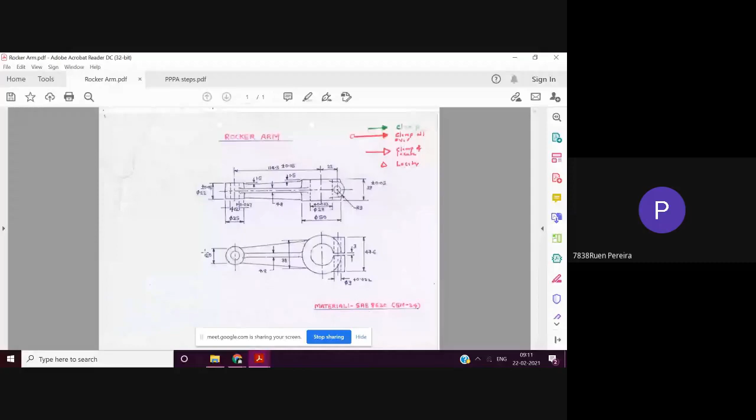Hello, hello. Yes, sir. Yeah.

This is the drawing of a rocker arm, and we are going to do preliminary part print analysis for this. Some steps have already been covered. I hope you went through this during the weekend. It is not that complicated, but also not that easy.

Now, machining wise, you have to maintain this thickness, 22 plus minus 0.05 -- this should not be shown with that symbol, that is wrong. This diameter 22 symbol is also wrong. So the thickness is 22 plus minus 0.05, then this thickness of 28 plus minus 0.05 must be maintained.

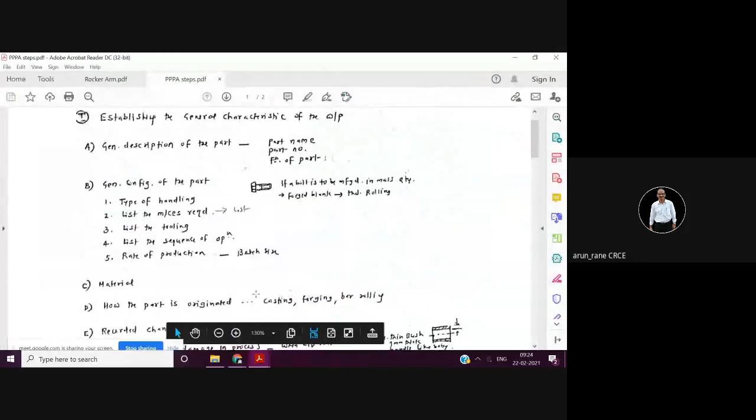So establishing the general characteristics, we have done this already. Auxiliary methods of visualizing the parts - here, since the part is a little complicated, we can write that a 3D model will be required, or some sample will be required for better understanding.

Principal process is cutting, and in cutting the major process is milling, because in milling you are going to finish, you are going to do most of the operations. Most of the operations are being done on milling machines. So principal process is cutting, and the major operation within it is milling.

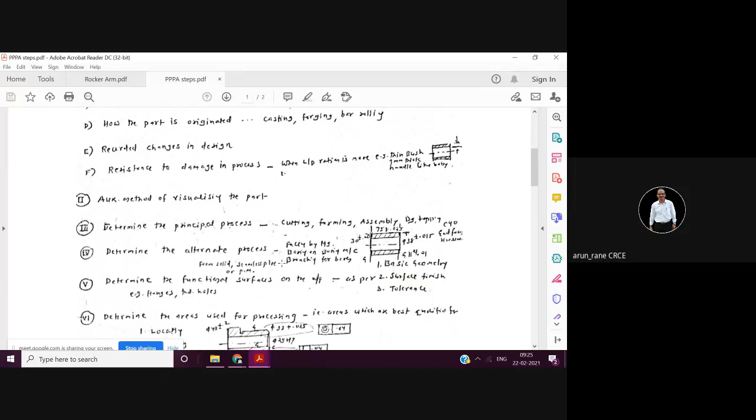Now functionally determine the functionally important surfaces on the workpiece. Functionally important surfaces are based on three categories: geometry, surface finish, and tolerances. Let us see now whether it is given in the drawing, and how we will identify it.

Based on geometry, you can write nil, because nothing is mentioned - whether this bore should be concentric to this, or perpendicular to that. Such specifications are not given, so against geometry you write nil. And against surface finish, there are no surface finish symbols, grinding symbols etc., so there also you write nil.

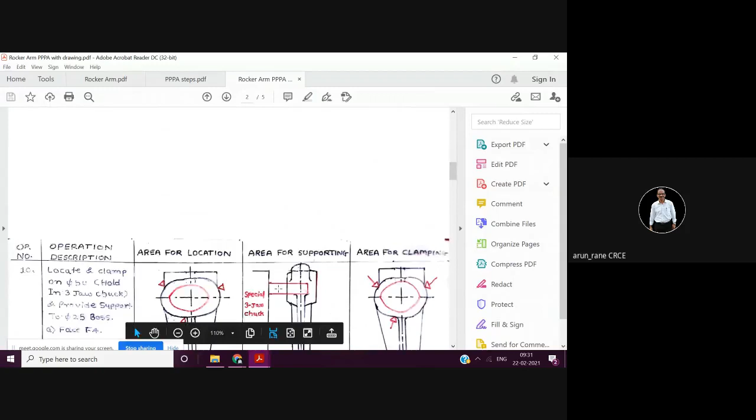So just give me a moment. This is the PPT. Here it is: preliminary part print analysis rocker. I think I have already uploaded this. In these notes, everything has been given clearly, and this is not ideal. There could be some mistakes, right? So you can have your own sequence. You can have your own locations. But now I will tell you what is happening here.

See, this is your faceplate, right? Here he is locating in a 3 jaw chuck, and he is doing this bore and also this facing. So the area suitable for location is this. Then the area suitable for supporting: this face and this face are not in one line, and this is a faceplate. On this faceplate you have mounted a chuck which is locating this and supporting this, right? And now areas for clamping. Your location as well as clamping is the same, so this outside surface can be used for clamping also. You have to see that when you are clamping with a jaw, there is no obstacle due to this rib.

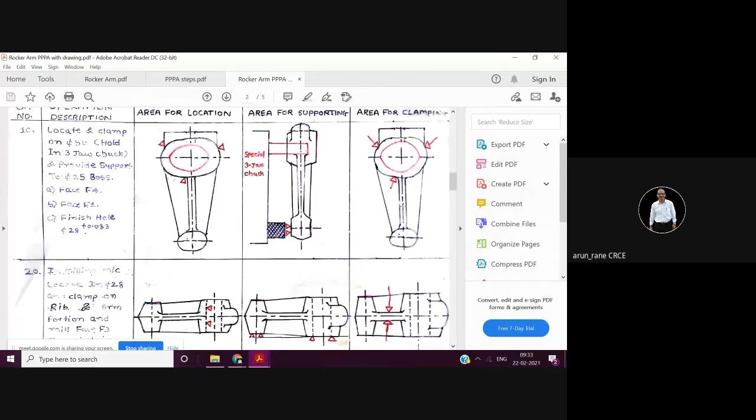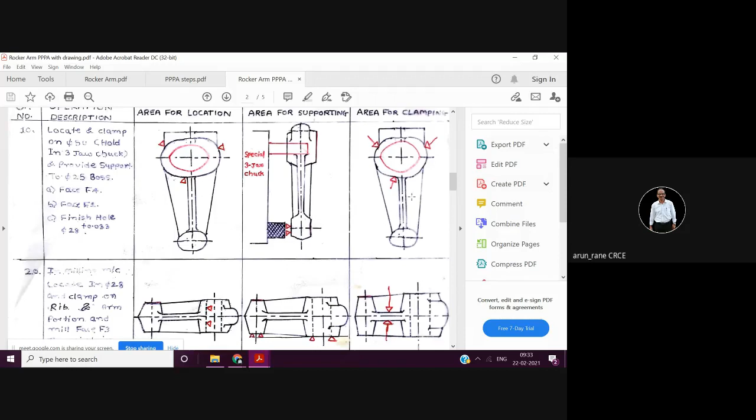And since there are 3 jaws, ideally you should have used a 4 jaw, because this is rough. So that's a mistake here. And another thing is, since this will be 120 degrees, this rib may obstruct. So ideally you have to use a 4 jaw hard chuck, so the jaws will be exactly at 90 degrees and the rib will not be an obstacle. Then similarly here, these are your supporting surfaces, and if you want to clamp it on the rib, you can. Then once this bore has been done, you can locate this hole and now do this facing.

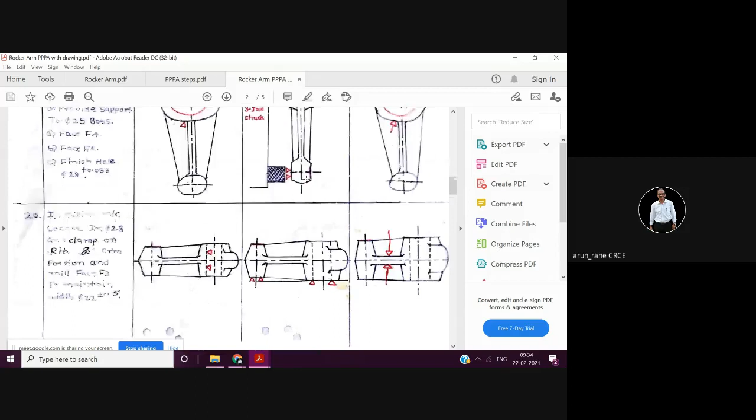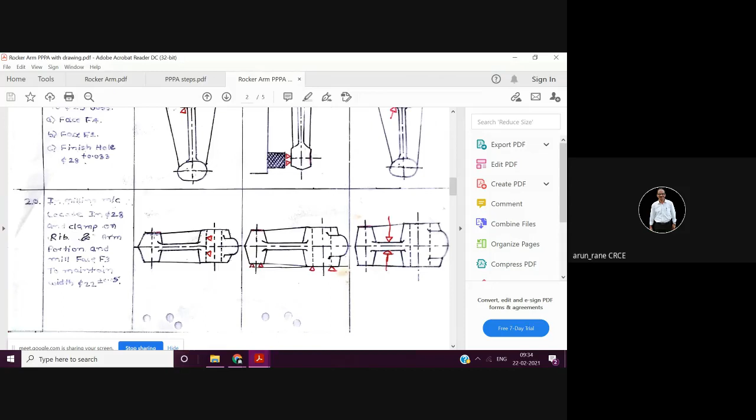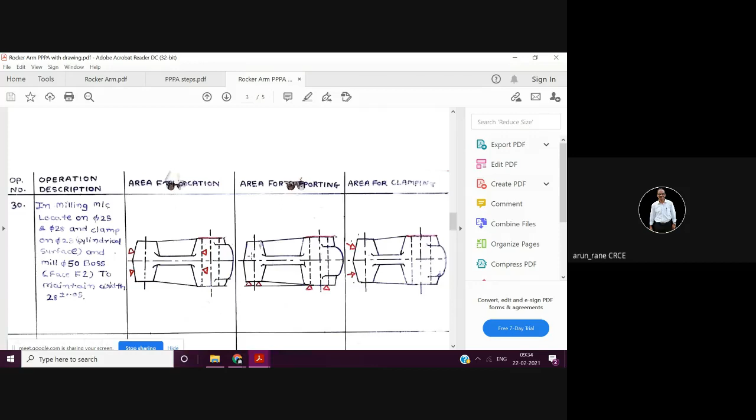Whatever operations are being done, you have to show by colored pen, either red or blue, so it is clear. Suppose here you are doing the bore, so this has been shown in red, right? Here this facing is done, and this drilling and reaming is done. He has not shown it here, but you have to show it in a different color so that it is visible. Now the direction has been changed. The piece has been reversed, and this face has been machined, right? But we have already done this face on the lathe machine.

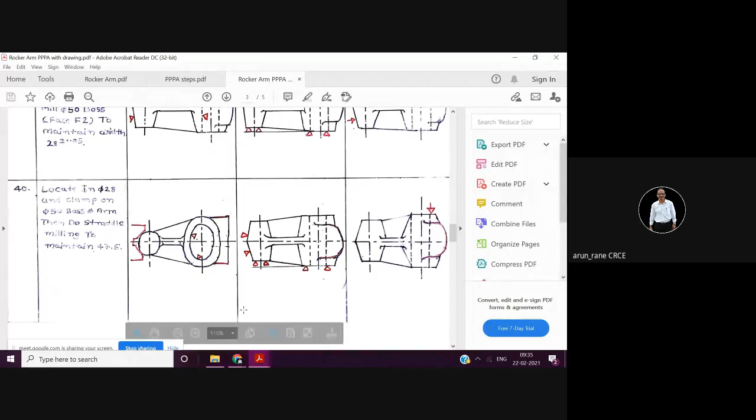Now see, this is your location. So this is being located. Now he is doing straddle milling. If you look a little carefully, you can see that this face and this face are milled. So that is straddle milling. So how has it been located? He has located on this bore, and these surfaces are being milled.

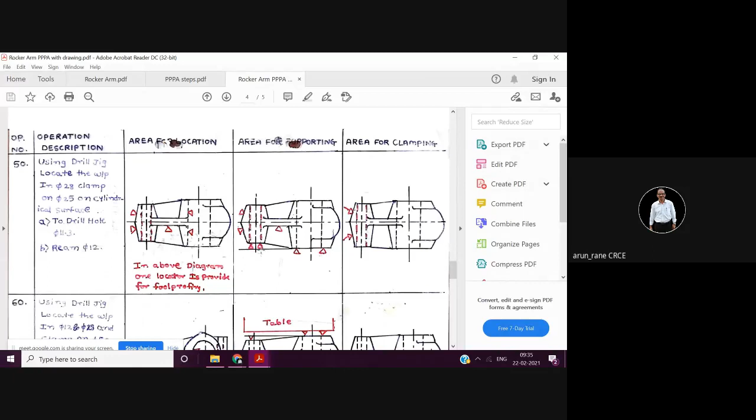So now, which hole? 11.3 and diameter 12. So this hole is now being drilled and reamed, and that is shown by another color. Again, this is the location. This is the support, because this and this are not in one plane, and this is your clamping. Right?

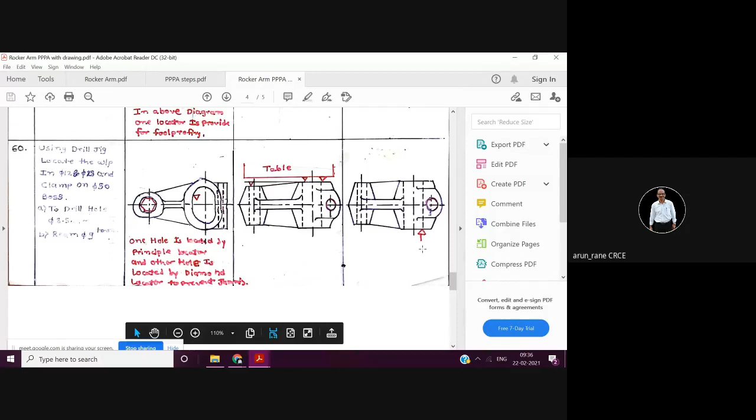Then you have to have that diameter 9 hole. So this is the diameter 9 hole. So again you have located here. Then one more diamond pin located here. Okay. Then this is your supporting surface, and this is how you are clamped here, and then you are doing this drilling. Okay.

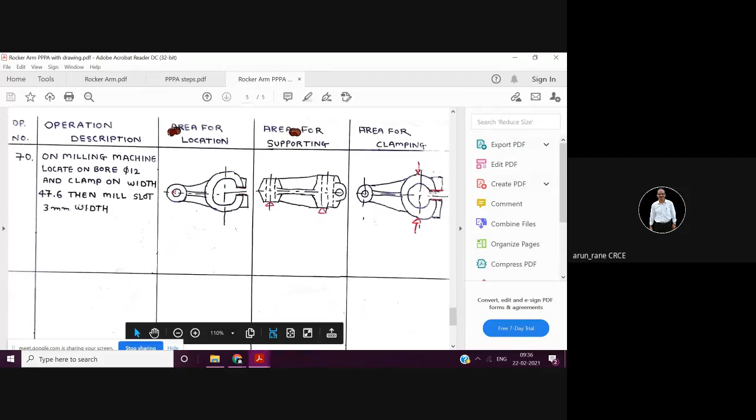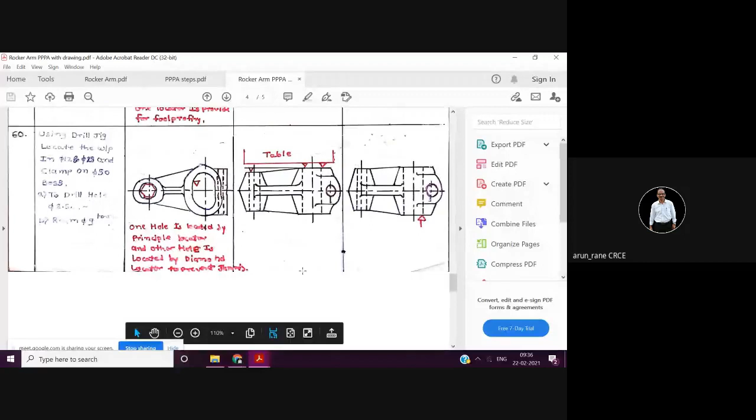Now this slot. This slot has been done at the end. But then what happens here? If you are doing this on a drilling machine, then the component will move from milling to drilling, and then again from drilling to milling. So instead of going on drilling, you can do it on milling also. So this is how your operation sequence will be.

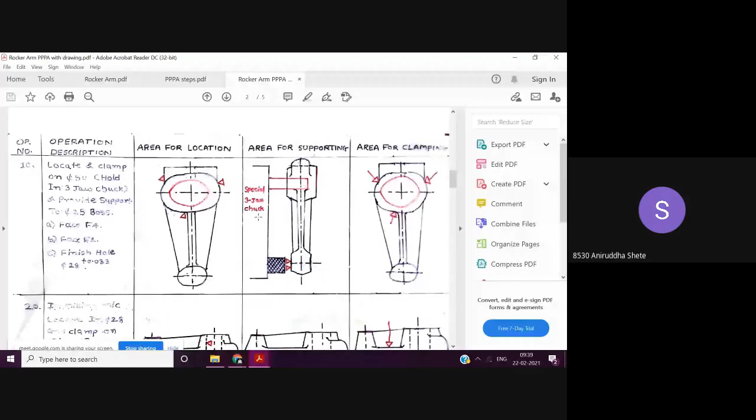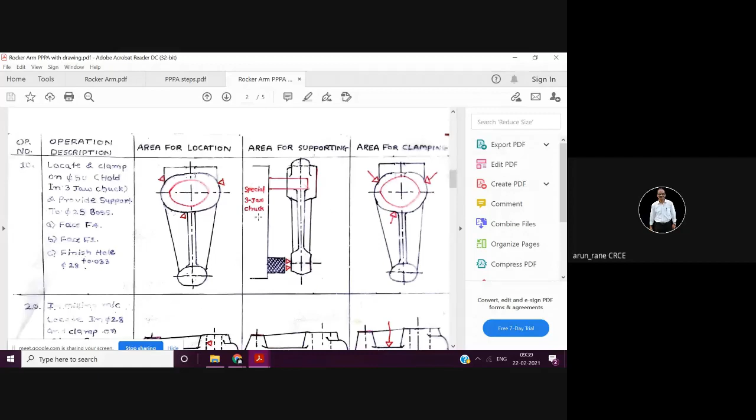You are not doing any location, supporting or clamping from the tailstock. On the tailstock only the drill will come. Understand? So the tailstock will not come in the picture at all.

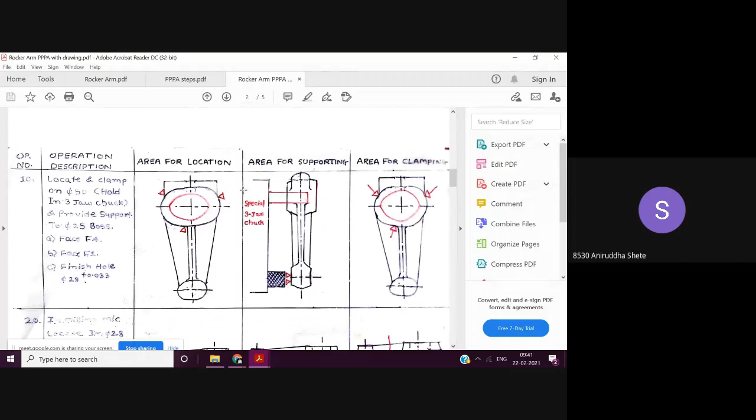It's a fixture. The chuck is mounted on a plate. This is a turning fixture. So your chuck is mounted on a plate, and on the plate you have another supporting block here to give the support to this face. This will be a turning fixture, and this whole fixture will be mounted on the lathe machine spindle. So that fixture will have a three-jaw chuck and a supporting block here.

So this is an accessory, sir? That is the accessory. That is your accessory.

And if you want to avoid this, then you can do this component entirely on the milling machine itself. In the milling machine, you again have a milling fixture, so you can support here, you can locate here. Then you can have a V block here, so the V block will locate this component in this direction, and then you can do this facing here, and you can do the drilling and boring.

I am giving you this example so you understand that this can be done on a lathe machine. Otherwise, practically speaking, if you want to save machining time, this particular component has to be done on the milling machine. All the operations, this entire component, will be finished on the milling machine. Okay, vertical milling here.

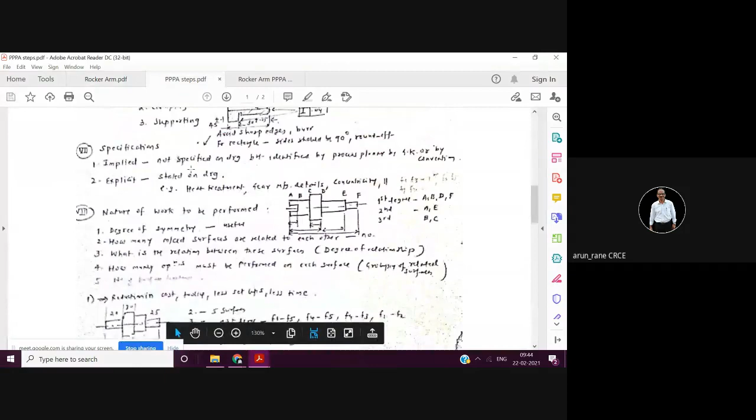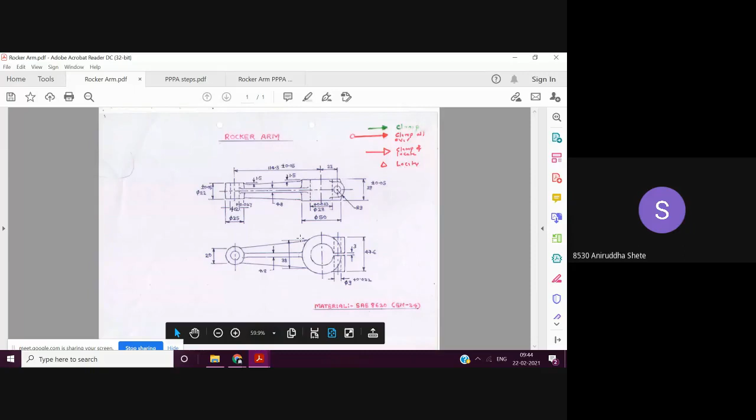And then nature of work to be performed. Now, degree of symmetry. What is the degree of symmetry for this component? It is symmetrical about the x-axis, isn't it? It is not symmetrical about the y-axis. If I take the x-axis like this and the y-axis like this, about the y-axis it is not symmetrical, but about the x-axis it is symmetrical.

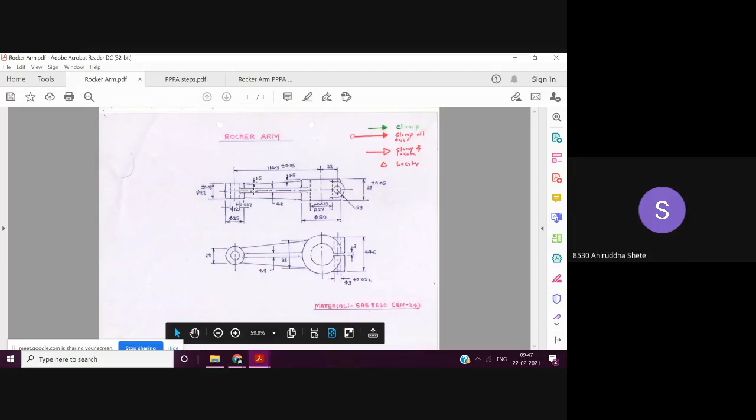Sir, and then... just a minute. So this is your grouping, and then you have to identify first degree. So अभी first degree कौन सा है? This is the first degree. This is the first degree. All right. Then this is first degree. This is first degree. Then second degree, अभी देखो third.

Now suppose I want to find out this total length. So for total length I have to take this, I have to take this, then I have to find out this, and I have to find out this, isn't it? So that is your fourth degree. Four calculations you have to do. That means this total distance is not at all important. This you have to leave as forged. We are not doing any machining on this. Understand? So that is the purpose of identifying the first degree, second degree, third degree.

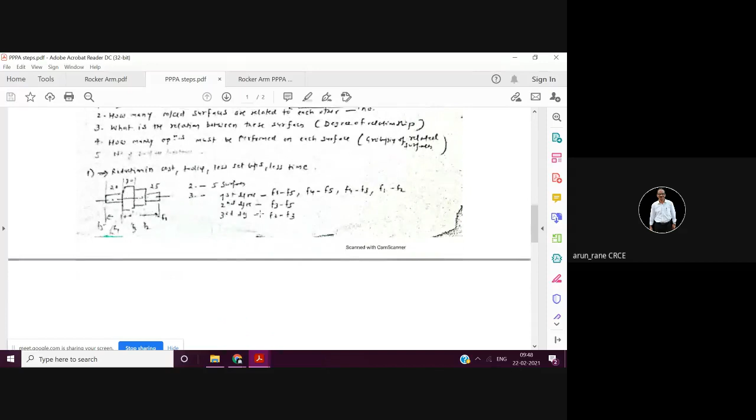So then you have to also identify how many surfaces you can do in one setting. And then finally you have finishing and identifying operations, like where the number will be punched, whether you want to dispatch the components by oiling. So in this case, this step is not there, that is relating the part to assembly, in which assembly this part goes. Now this you will not be able to understand, because you don't know what the other different components are.

But the product engineer or design engineer knows कि इसके अंदर कौन सा कंपोनेंट जाने वाला है. You understand? That is इसमें क्या जाने वाला है, इसमें क्या जाने वाला है, and where this part is going to fit because of this 114.3. So the product engineer mentions what other components are going to be assembled in this component. But here we don't know, because we don't have a total assembly drawing of this particular product. So that's why we are not doing it.

Now here, where will you punch the part number? You have to identify a face. You have to see that you don't punch it on an aesthetically important surface. Aesthetically important surface पे आपको punch नहीं करना है. So now where will you punch? This rib, you can punch it on the rib. That is यहाँ पे या यहाँ पे भी punch कर सकते हैं. But this surface is rough. It is in the forging condition.

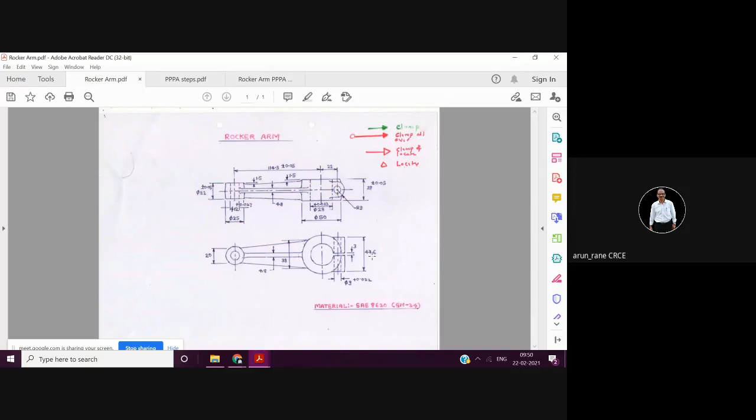So you can do etching, or you can do laser. Laser marking is very fast. Because this is very important product identification, you can do the laser marking on this surface. ये surface के ऊपर आप laser marking कर सकते हैं. And laser marking is very fast, 4 to 5 seconds totally. That is loading, then the laser itself will take 1 or 2 seconds, loading 2 seconds, and unloading 2 seconds. You don't have to do any clamping because there are no tool forces.

And then how you will pack and how you will dispatch. Now this is a forging, EN24. So it may happen that the component will rust, because it is not a casting grade, because of the iron. So you can give the instruction that you need to oil these holes, that is this bore diameter 12, and this bore has to be oiled. Then this 28, that is this surface and this surface, these are the surfaces which are going inside some other surfaces. So here also you can put some oil or grease, right?

And then you can pack it in a bubble paper, or you can pack it in small boxes, wooden boxes, हाँ, छोटा छोटा बॉक्स के ऊपर, and you can have a wooden pallet of 100 by 100. On that wooden pallet you can have small wooden pins. Wooden pins, two wooden pins. You imagine a pallet of say 1 feet by 1 feet, बराबर है? And then in that you can have wooden pins, बराबर है?

which are mounted. Since this is to be mounted, this is manufactured in say 5,000, 10,000 pieces a batch. So you have to make those pallets also for handling. So on the wooden pallet you can fix a number of pins of this size. Need not be very precise. You can have one pin of say 25 and another pin of say diameter 10, and they are kept at this distance 114.3.

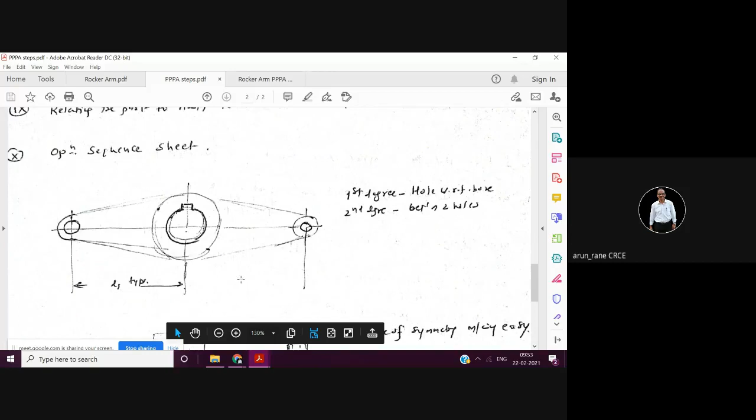So after finishing and identifying operations, in the operation sequence sheet you have to just write down the list of the operations. That's all. Detailed operations you are not doing here. Only operation number 10, 20, 30, 40. What you are going to do in operation number 10, that much only. And the machine name, that is in operation number 10 what I am going to do.

Now let us talk about if I am going to do it on a milling machine. Fine. So the entire component I'll do on the milling machine with the help of the accessories and with the fixture. So operation number 10 will be face this, and drill and bore this. See how easy I am going to make it now. So facing of this and drilling and boring of this. At the same time, on the milling machine, I can do facing this and drilling and reaming, or drilling and boring.

Boring, I am a little worried because such small boring bars are not available. So drilling and reaming will be the best option. Understand? So what will happen in operation number 10? I'll do this. Now here I am not discussing any location clamping. First you have to decide upon operations, and then you can decide upon location clamping and so forth.

So first I am doing this drilling, boring. First is of course facing, because before you do drilling the face should be flat and machined. You cannot do drilling on the rough surface, that is by default. So first will be face this surface, then I will do drilling and boring of this, and then I will do drilling and reaming on this. So that is my operation number 10. Then I will turn it upside down.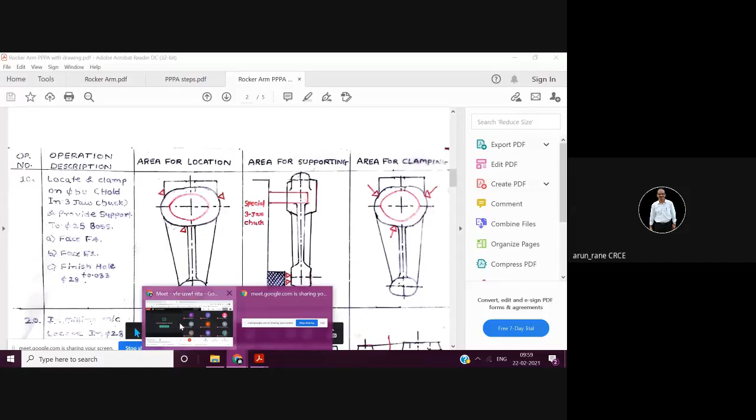Hope you have understood this. So I have explained you preliminary part print analysis of the transbearing gauge, then of the rocker arm, and I explained the manufacturing processes completely of ball pillar. Purposely, I have not discussed preliminary part print analysis of ball pillar because I have kept that as homework for you.

I had asked you how you will do this second assignment, whether one component, or how you will divide into groups. I'm still worried because the attendance is 30, 35 and the students are 70, 75, so I don't know how to issue the drawings, how to make the groups.

Neeraj, are you there? Can you just tell me? Neeraj... is he gone? Neeraj Jain.

Sachin, can you tell me how do I make the groups? Sir, we have already made groups for production tooling. If we are using the same group, will that be okay?